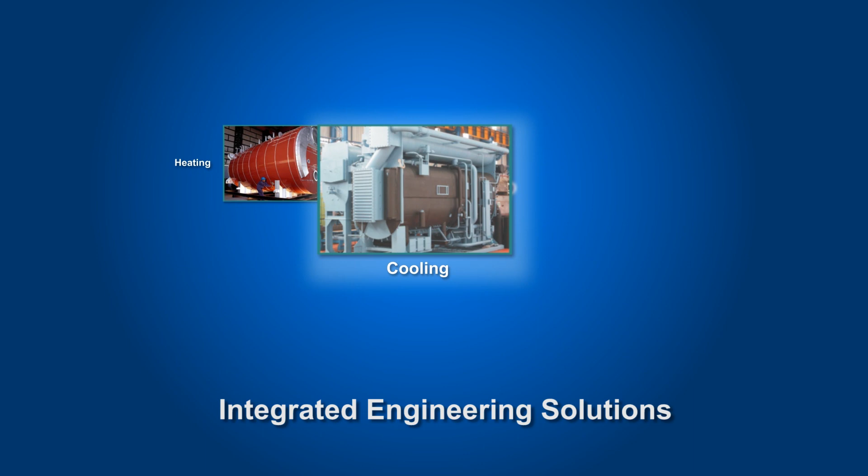THERMAX is an engineering powerhouse, providing sustainable solutions in energy and environment. The company's vision for the future is firmly anchored in the belief that to stay competitive, companies need to adopt sustainable development practices. THERMAX's business portfolio comprises integrated and innovative solutions in heating, cooling, power, water and waste management, air pollution control, and specialty chemicals. Today, THERMAX solutions are helping a spectrum of industries across the globe boost resource productivity, improve bottom lines, and maintain a cleaner environment.

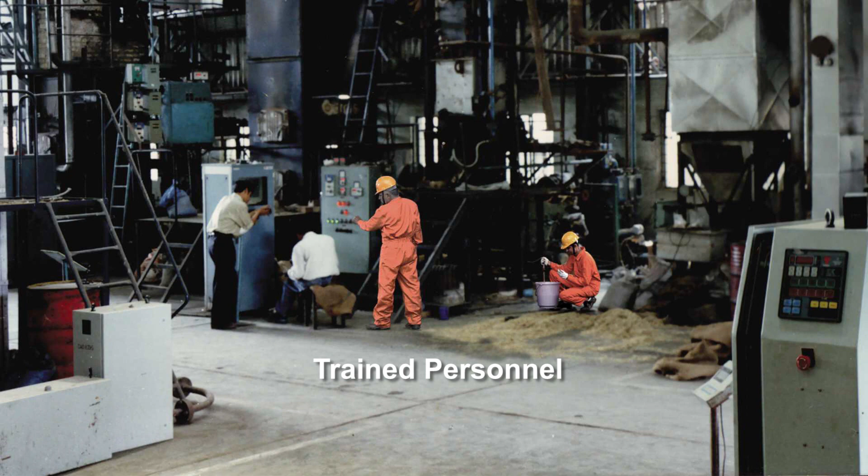THERMAX ONSITE Energy Solutions Limited, TOESL, is a wholly owned subsidiary of THERMAX Limited. It was set up in 2009 when increasingly stringent environmental laws, more and more intricate technology needing fully trained personnel, and irregular supply as well as inconsistent quality of green fuels was making utility management across industries forbiddingly complex, increasingly expensive, and very time-consuming.

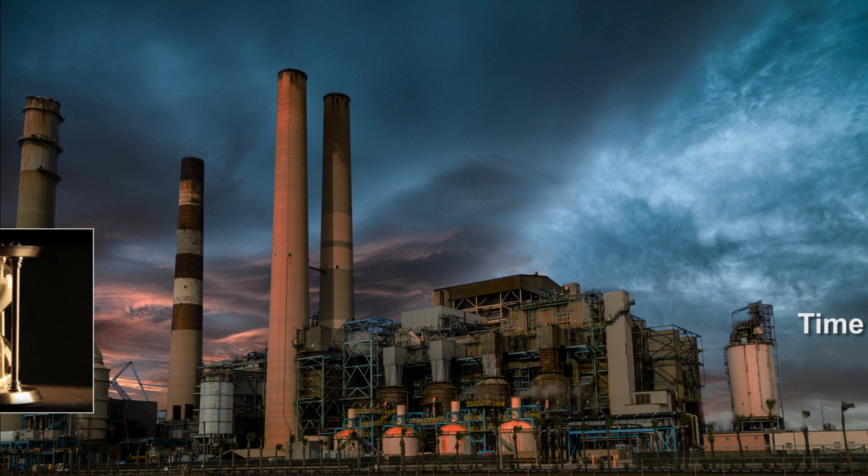Against this gloomy backdrop, TOESL came as the silver lining. Set up to address the growing market need for professional, outsourced utility management services, TOESL leverages a unique business model where the customers are spared the capital expenditure of owning utilities and the attendant burden of running them.

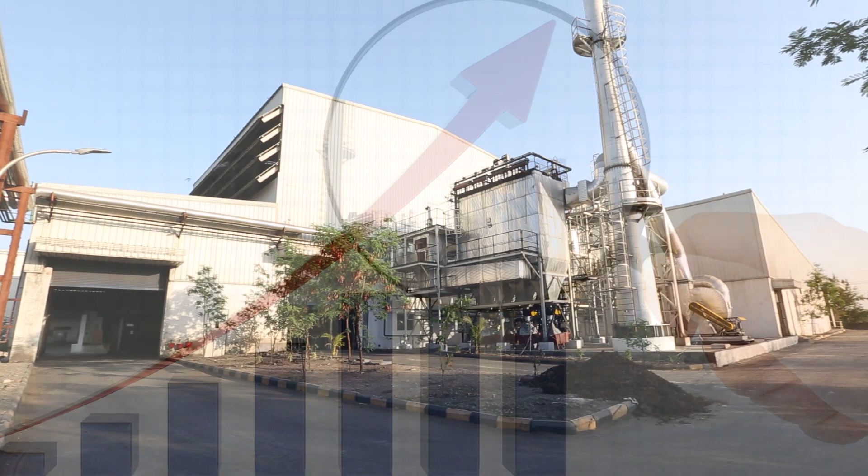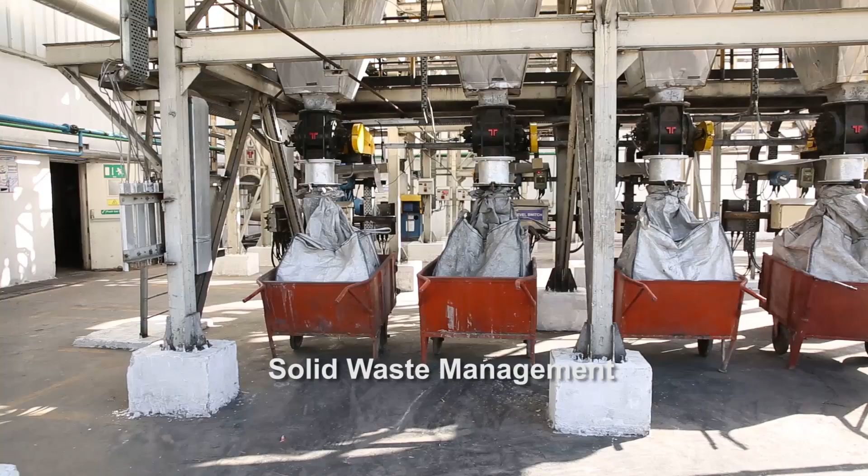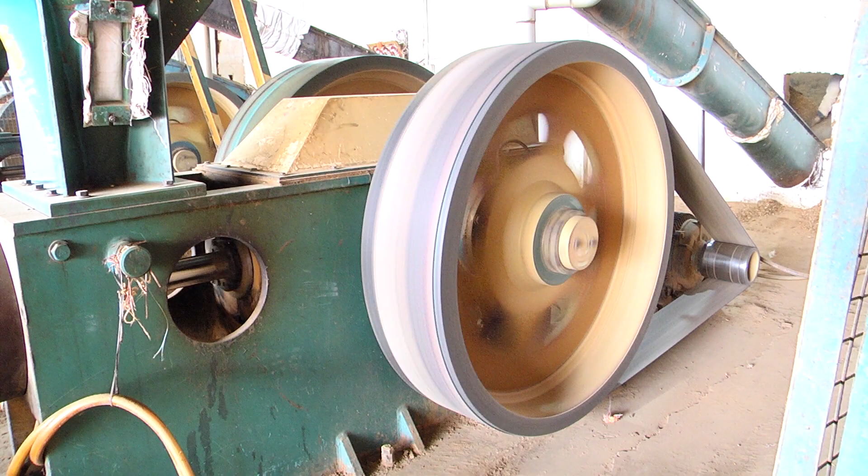Instead, we enable them to focus more on their core manufacturing processes, while TOESL invests in and manages all the utility equipment, undertakes comprehensive operation and maintenance, including biomass fuel supply and solid waste management, and ensures uninterrupted supply of utility. The customer only pays for the metered quantity of utility consumed. Also, utilities set up by THERMAX on-site leverage green fuels, waste heat, etc.

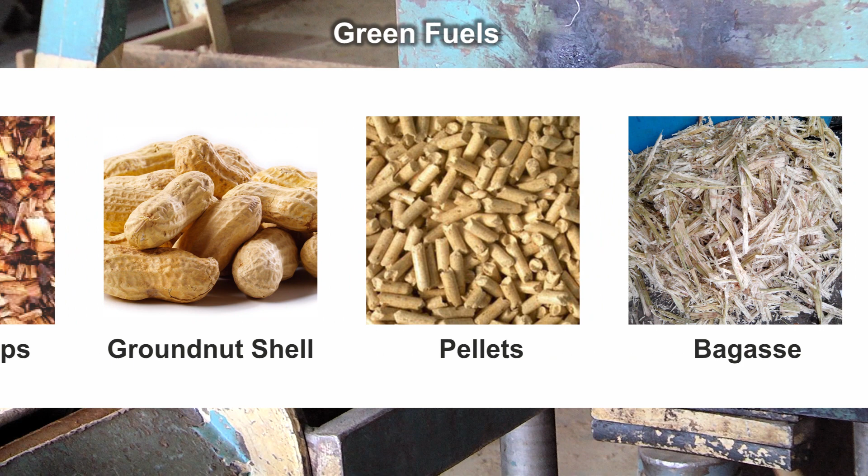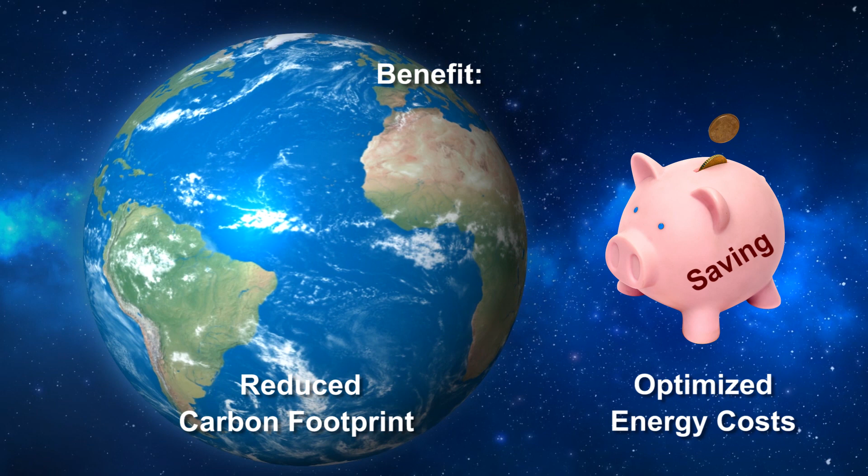The result: reduced carbon footprint and optimized energy costs. Taking the customer into confidence, TOESL handles everything. The objective: to provide uninterrupted utilities to customer.

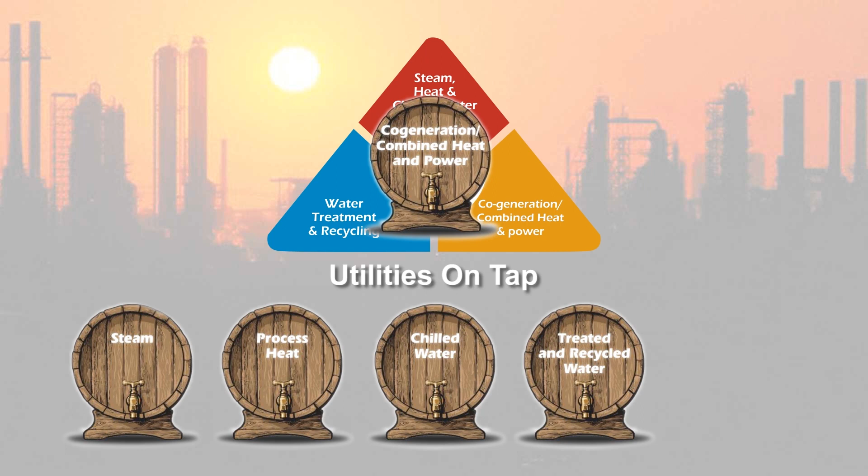What the customer gets on tap is steam, process heat, chilled water, treated and recycled water, and cogeneration and combined heat and power.

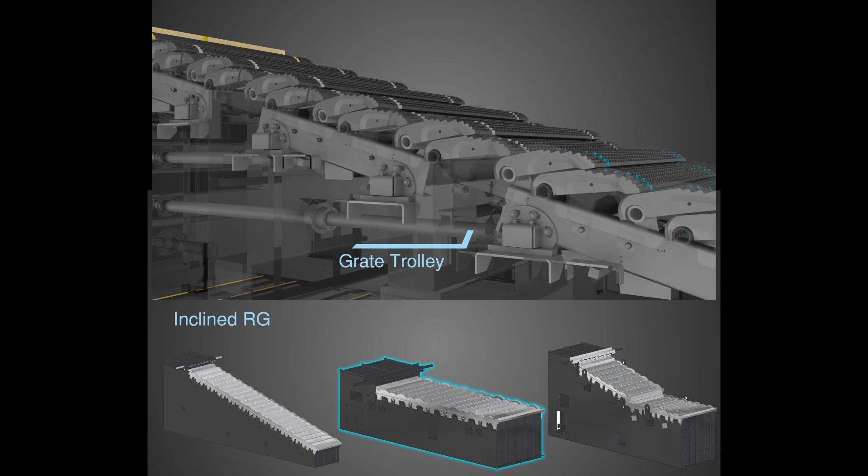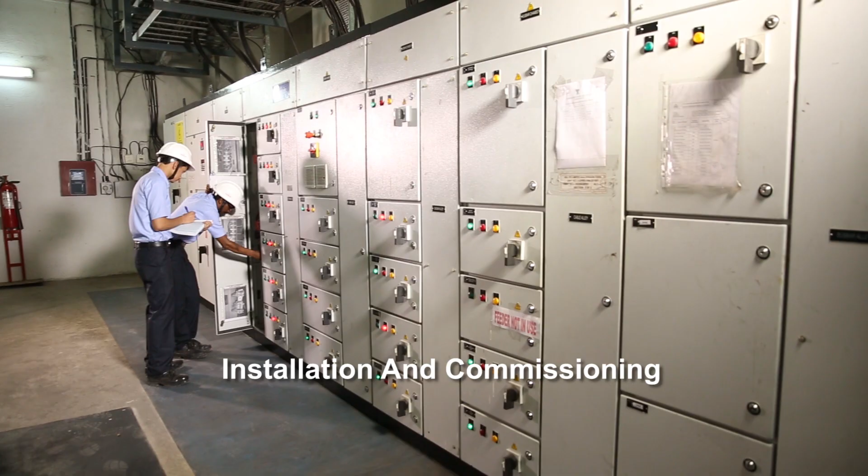So how does TOESL offer reliable solutions in steam and heating? We select the boiler technology best suited to specific customer requirement, as well as site location and types of biomass available in the area. We install and commission the unit to be run by our team of experts and operators on site.

All boiler operations and allied systems are monitored and controlled with PLC and SCADA, which facilitate MIS generation on daily and weekly basis. TOESL's facility manager supervises boiler operations as per detailed operation and maintenance SOPs, which, once installed, are strictly followed to ensure uninterrupted supply of steam to the customer. These SOPs cover all activities at site.

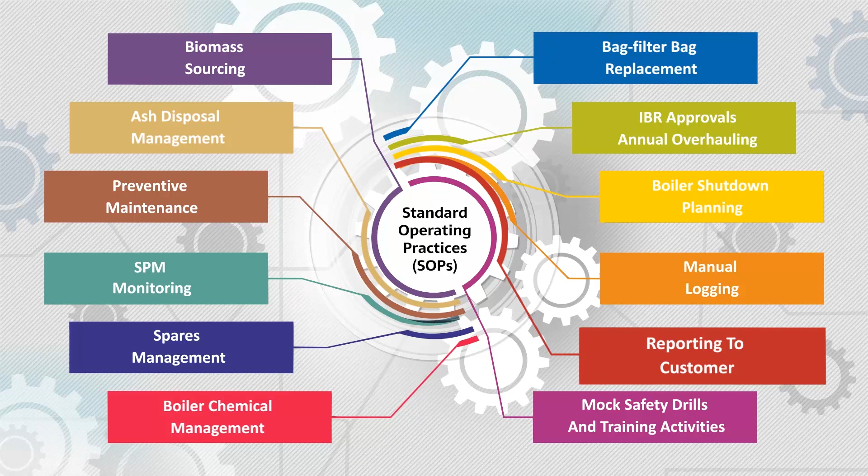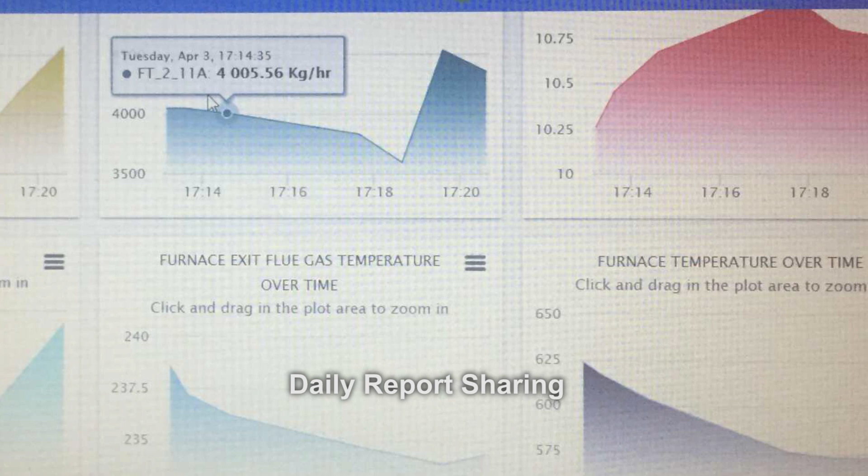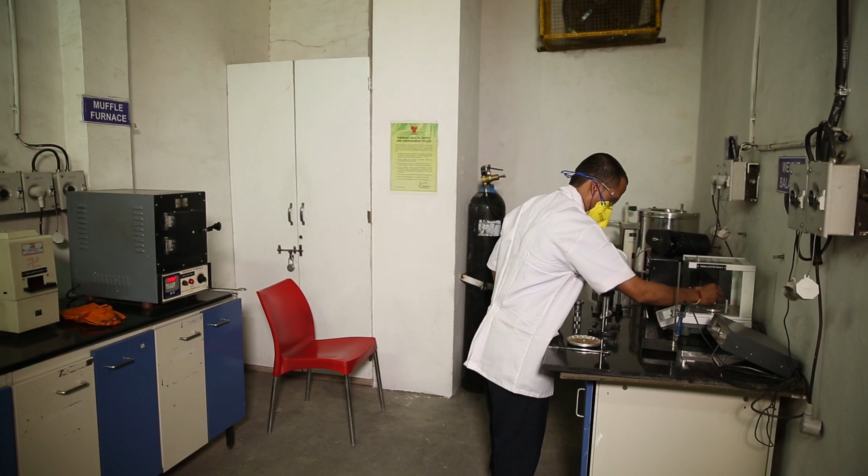Daily reports of process heat or steam consumed and related parameters are shared with the customer and referred for steam billing. TOESL's efficiency in fuel sourcing is based on its experience of handling about 500 tons of biomass every day on a pan-India basis. And to ensure quality, every fuel load that enters the utility undergoes sampling and lab tests.

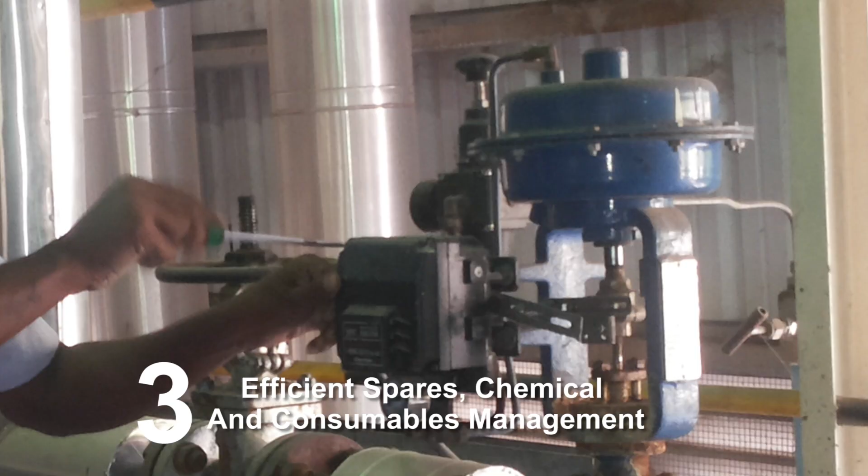Outsourced utility solutions from TOESL also come with the assurance of minimum boiler stoppages. This is ensured by a combination of 4 factors working in tandem: experienced and well-trained manpower, leveraging the best available technology and automation, efficient spares, chemical and consumable management, and inbuilt redundancies in the system to eliminate downtime.

TOESL's guarantee of performance comes from its commitment to high operating efficiency at all its sites, and an assurance of the quality and quantity of utilities that customers can bank on.

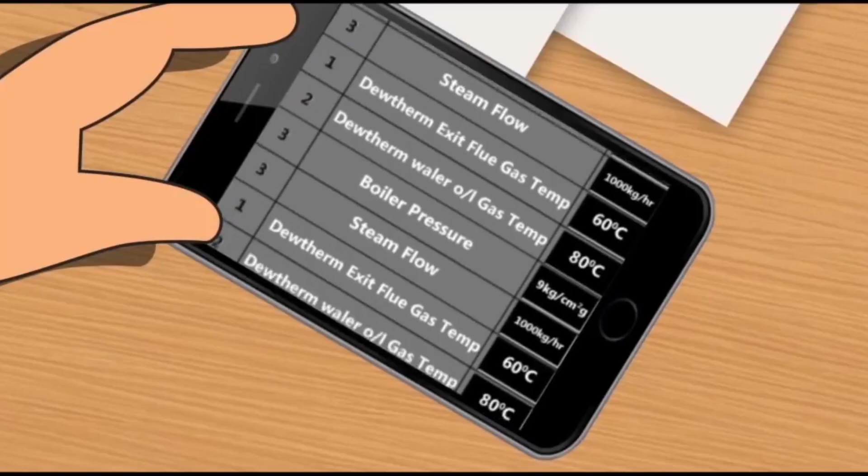TOESL adheres to every THERMAX safety guideline based on 5 decades of experience in India and around the world, as well as customer safety norms. In addition, all sites are OHSAS certified. For added customer convenience, we also provide online data collection and monitoring mechanisms.

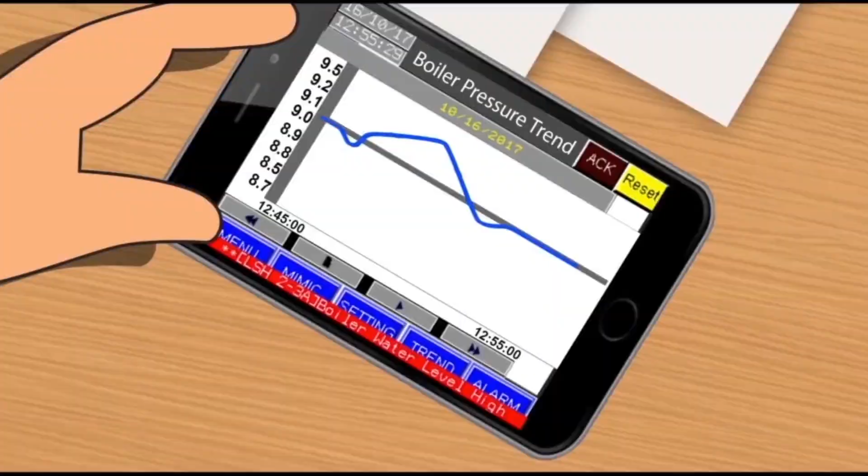TOESL reduces the burden on the customer in another critical area by assuming complete responsibility for IBR compliance and meeting PCB norm. Ash disposal as per environmental guideline is another important function taken care of by TOESL.

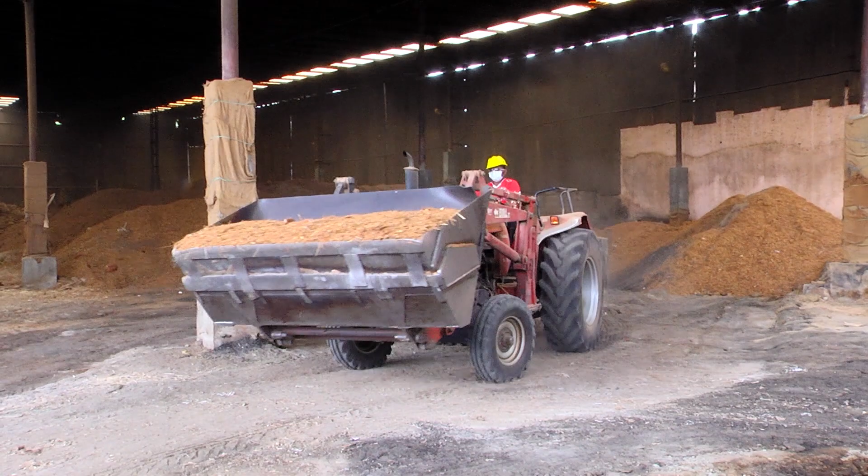Fuel being the most critical input, TOESL is setting up a network of captive biomass briquetting units across India as a strategic backward integration initiative. At the 2 units already in operation in Maharashtra and Karnataka, seasonally available agro-waste are used in specific proportions based on their characteristics to produce biomass fuels at competitive prices.

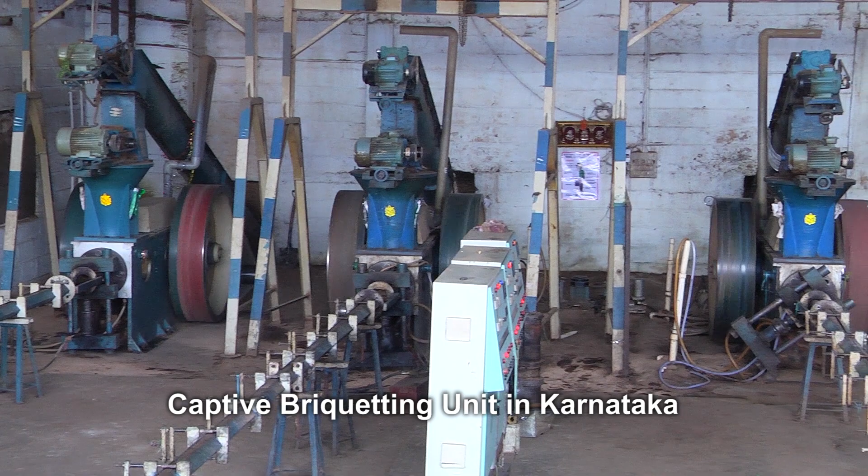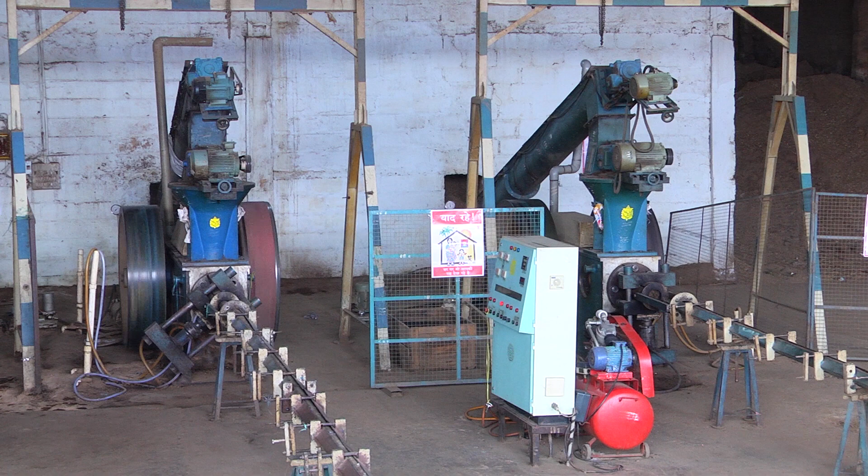These plants ensure an uninterrupted supply of consistently high-quality biomass fuel through the life cycle of boiler systems installed at TOESL customer sites. TOESL can also strategically invest in captive biomass briquetting facilities for customers if required.

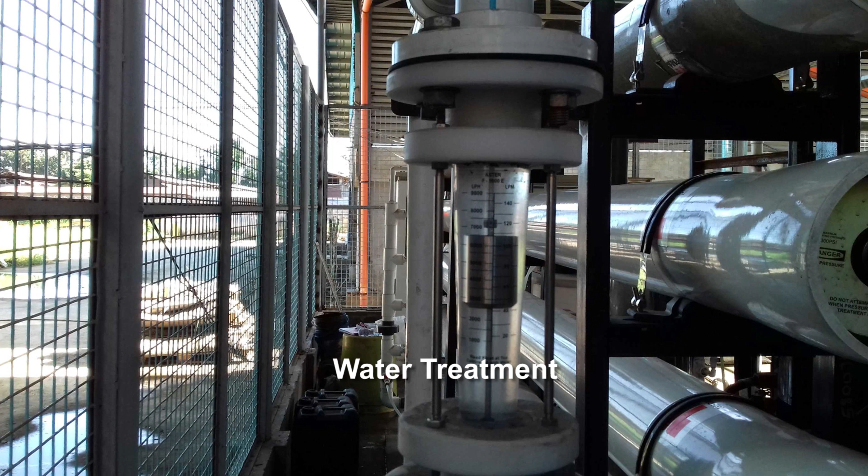TOESL offers similar solutions in the areas of water and waste management and cogeneration. These solutions cover water treatment, wastewater treatment, effluent recycling, zero liquid discharge solutions, vapor absorption chillers, as well as cogeneration and combined heat and power solutions.

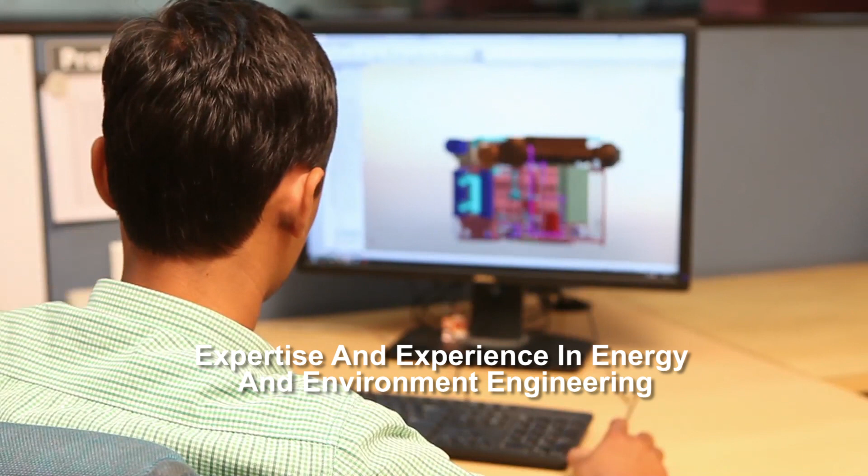By successfully leveraging THERMAX's in-house domain expertise and experience in energy and environment engineering garnered over 50 years, we are setting industry benchmarks in utility performance. TOESL's outsourced utility solutions come tried and tested in a spectrum of industries, comprising blue-chip names in the textile, chemical, paint, food, pharma, dairy and tobacco sectors.

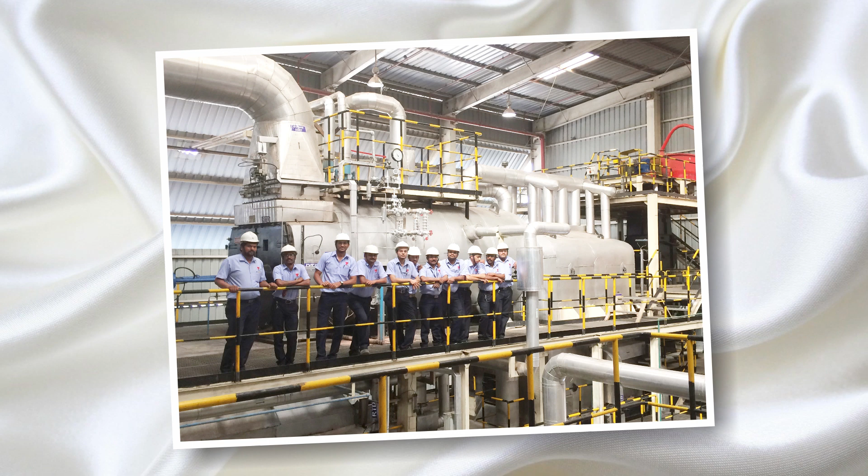Solutions that are backed by the THERMAX guarantee of performance and driven by more than 5 decades of pioneering experience as an energy environment major across the globe. Today, we are the natural choice of outsourced green-centric utility solutions that make economic sense. Solutions that are also doing their bit in the fight against climate change by helping customers reduce their carbon footprint.